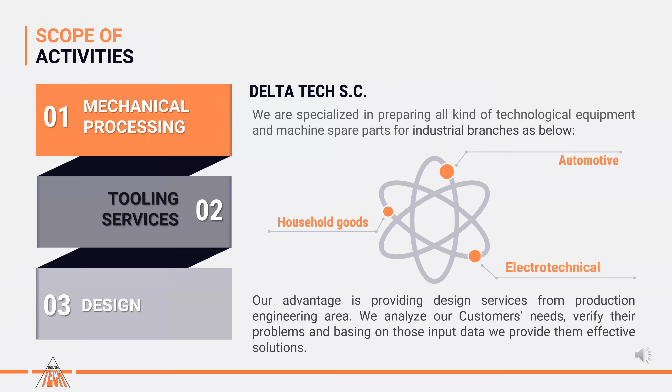We are specialized in preparing all kind of technological equipment and machine spare parts for industrial branches such as automotive, household goods, electrotechnical. Our advantage is providing design services from production engineering area. We analyze our customers' needs, verify their problems, and based on that input data, we provide them effective solutions.

Our scope of activities are mechanical processing, precise machining of tool steels, aluminum and plastics by CNC turning and milling, production of parts with high quality requirements, made of certified materials, from proven and well-noted suppliers.

Tooling services: turning and milling, grinding and wire cutting, drilling and threading, or CNC machining. Proven production technologies guarantee the precise realization of every detail at the highest level of service.

Design. Designs of machines and technical devices prepared in accordance with customer requirements, based on CAD/CAM software and experience of designers. Necessary technical calculations and explanations together with complete technical documentation, and final realization.

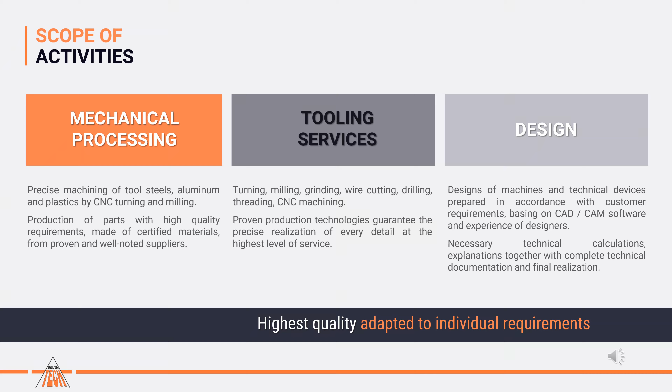Advantages of cooperation with Delta Tech: highest quality and precise machining, individual attitude to customer needs, complex projects realization, large machine park, modern technologies, specialized and experienced workers.